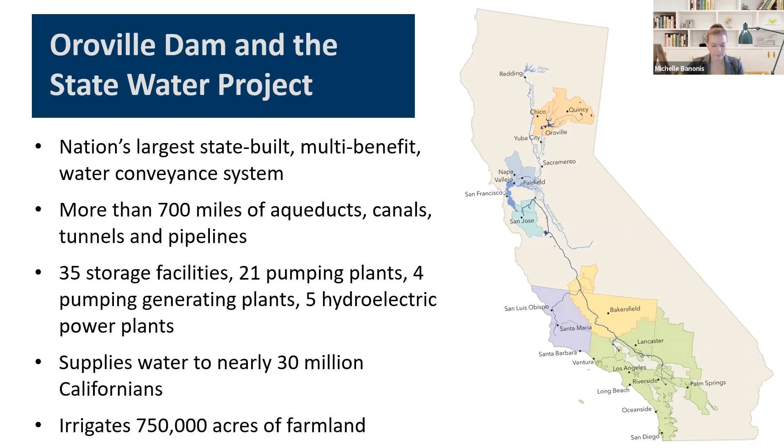So in January and February of 2017, we had some of the wettest months on record in the 110-year history of the Feather River Basin. The Feather River drainage from its tributaries provides the water supply to Oroville Dam and Reservoir, so in that watershed above Oroville we essentially received an entire year's worth of runoff.

4.4 million acre feet, for those that work in those numerics, it's a huge quantity, in 50 days over 2 months. That is unheard of. For those who study climate science, these types of events are unfortunately probably going to be more common in the future, the flashier flashes and the drier dries. So this was definitely a unique occurrence.

As water releases from the gated flood control spillway ramped up because the reservoir was filling, and we were trying to anticipate the inflow to Oroville Dam, DWR's employees noticed an unusual flow pattern in the main spillway. So the spillway outflow was stopped for inspection, and engineers found a large area of the concrete chute and foundation to be eroded, too significant at that time to repair given the pending flood conditions.

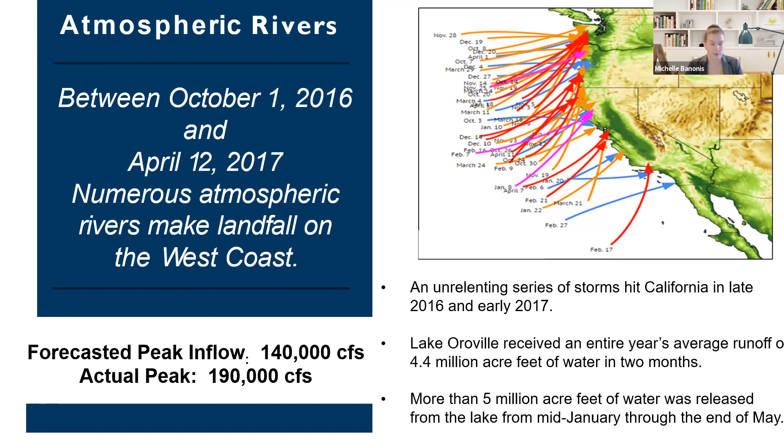DWR, my agency at that time, began consulting with the Federal Energy Regulatory Commission, FERC, which has their dam safety program, and also the California Division of Safety of Dams, which we call DSOD here in the state, to consider the steps forward.

So this is what it looked like. Of course, it started much smaller than this, but this is when we were actually able to shut off the flows and do the inspection.

As the flood control spillway releases were resumed after this and ramped up, we started to notice, because we had to make releases—it was either that or potential dam failure—people were really weighing options like, what do we do here?

They ramped up flows again down the spillway, and they started to notice significant headward, uphill erosion, and then also some downslope erosion as well. There's a diversion pool at the base of this facility.

DWR, FERC, DSOD, all the engineers and geologists were certain this would happen, but they actually didn't know how far upslope the erosion and damage would go. The primary concern at that time was if the erosion got too close to Oroville Dam and the gate control structure at the base of the dam, the spillway would have to be shut down entirely. We didn't want that either because it creates a huge issue for the integrity of the dam structure itself.

So we ramped up flows just enough to make flood space in the reservoir, and we were trying to avoid using an emergency spillway. There is an emergency spillway on this structure, which I mentioned earlier—as we're facing the chute here, it's to the left. It had never been used. Now, I won't go into why it was never used or tested, but it was constructed.

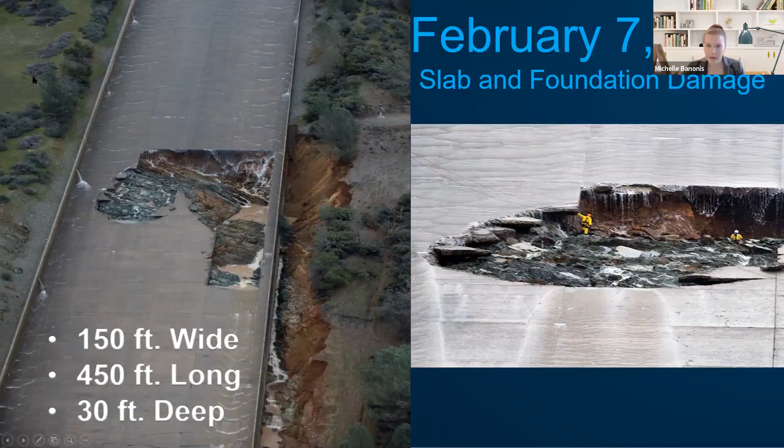So this was February 10th. Thinking a lot about balancing these risks, both of which were determined to be roughly proportionate at the time: it was either spill over the emergency spillway, which was a complete unknown for us, or severely damage the spillway structure and potentially some of the controlled outlet capabilities of the dam with higher releases.

Even though we were still releasing flows down the spillway, you can see in this picture that by this point the chute was pretty severely degraded. Some of the control walls here were worn away. There was water flowing all the way down to bedrock on this side. But even though we were making these controlled releases as much as we could, given the conditions, to try to maintain a safe level in the dam, we still ended up having to use the emergency spillway.

The day after this photo was taken, Lake Oroville's level rose above 901 feet, which is the safe storage space. At about 8 a.m., water flowed over the lip of the concrete weir of the emergency spillway, engaging it for the first time in the facility's 49-year history.

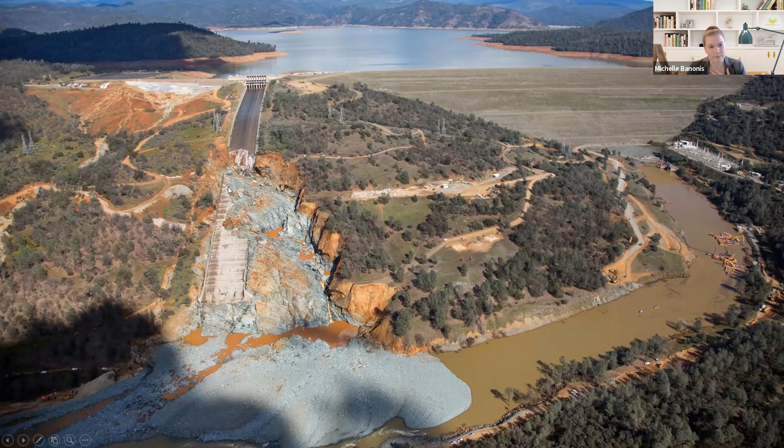This was the concrete weir I was telling you about, the emergency spillway, and this is the main spillway. You can see just a significant amount of scour in here—all of these concrete panels have been completely uplifted and essentially pulled off.

Recovery occurred in two phases. This is focused on phase one of the spillways emergency recovery project. The idea was to ensure that by November 1st of 2017, the gated flood control outlet, or the main spillway, could handle reservoir releases of at least 100,000 cubic feet per second before the next flood season.

If you look at this slide, you can see just the extent of the work that's needed, and you can really get a feel for the time constraints here. We're talking about a monumental effort to try to get to a stage of feeling comfortable and confident in the public safety of the facility.

The design happened from March to June, roughly a 4-month time frame. We mobilized in April, and construction occurred in only 5 months for this first phase. So this is pretty substantial.

We awarded the construction contract to Kiewit West—for folks who worked with Kiewit, a really reputable company—and we awarded that in April of 2017. I'll talk a little bit more about some of the contract elements, but the original contract amount was for $276 million.

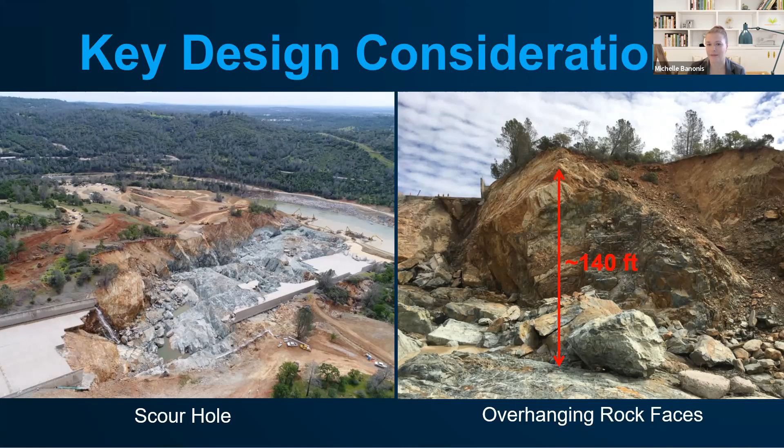Some of the key design considerations—these pictures kind of say it all. We had a few areas with scour holes, you can see that on the left. There's a diversion pool at the base of the dam here, and some of the baffles that had been eroded as well. This whole area needed to basically be filled in, layer at a time, to rebuild the spillway. On the right, you can see almost a zoom-in of the scour hole area—there are these huge overhanging rock faces, about 140 feet tall, that we had to take into consideration when rebuilding the facility.

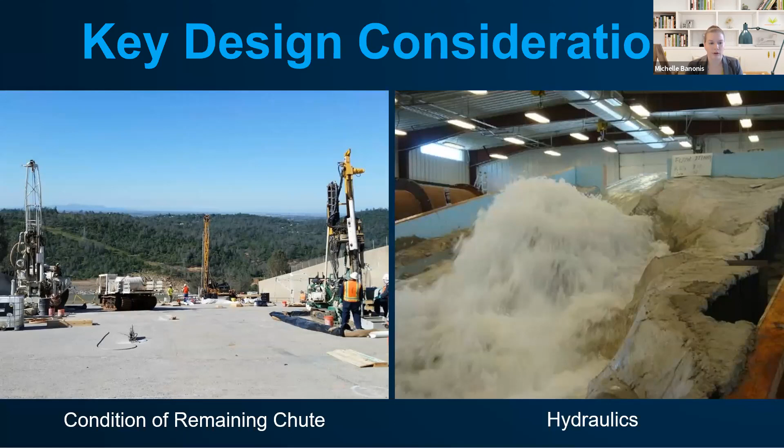Also, we had to question the condition of the remaining chute—do you save it, do you preserve it, or do you totally blow it out of there and start again, so to speak? These were some pretty major considerations, and then of course, just considering the overall hydraulics of the area.

This is sort of the construction sequence, and everything in here that's 2017 is phase 1, and everything that's 2018 is phase 2.

This cross-section down in the lower left-hand corner, I think, is a really good representation of the amount of effort that we had to undertake. This shows a cross-section of the underlying bedrock that had been worn away by the water, and we had to go in and do layer by layer of roller compacted concrete to get to the main spillway chute elevation.

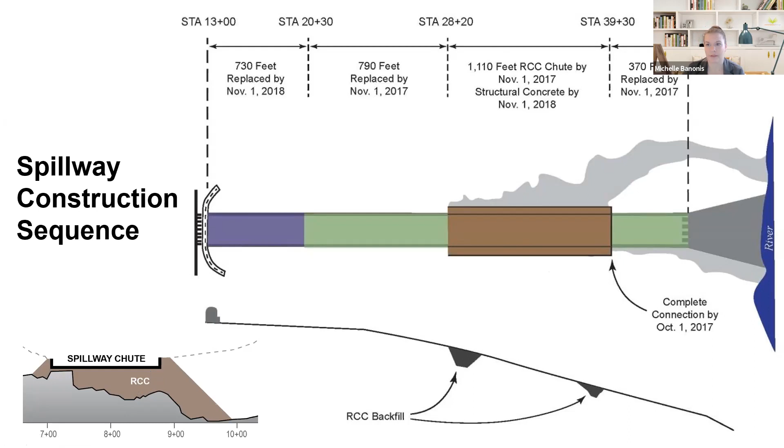This was a huge effort, and some of these efforts overlapped on each other. For example, in this middle section, we put in RCC, but then for the next phase we went in and actually put in structural concrete on top of that. So this was definitely something that had to be staged very carefully.

Just some key design milestones here. We advertised the Spillways contract at the end of March 2017, and awarded the contract on April 20th, 2017. For anybody that's worked in private industry or in state or federal government, for a contract of this magnitude, that's almost unheard of. The fact that we pulled that together so quickly was actually pretty impressive.

The scour hole slope stabilization was early May. 75% plans and specs were mid-May. Final plans and specs were the end of June, and revised plans and specs were the end of July.

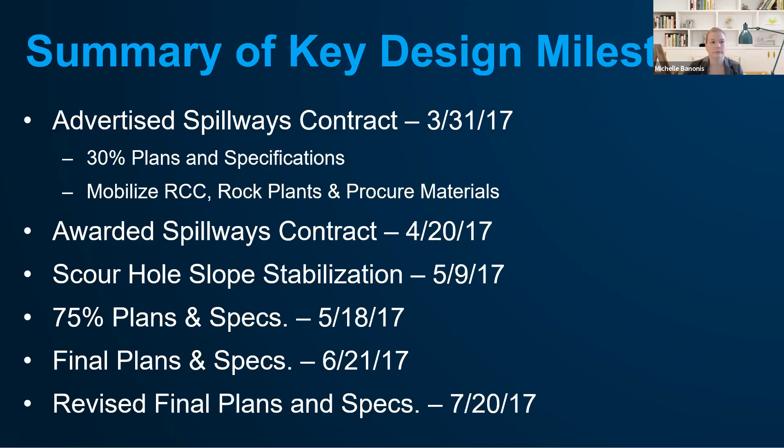I'll go through some pictures here, and give a verbal overview of the next series of photos, because I think they really speak for themselves. So I won't be talking too much about them, but I'm just going to give a preface.

During phase 1, DWR and Kiewit removed and reconstructed more than 2,200 feet of the main spillway. The section of the upper chute and lower chute were demolished and later replaced with structural concrete slabs and walls. More than 1,000 feet of the middle chute of the main spillway was reconstructed with approximately 350,000 cubic yards of roller compacted concrete.

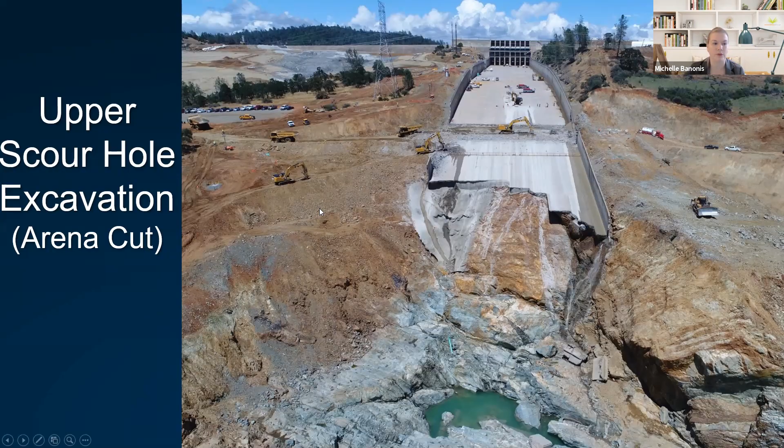This is one of the sections where the large scour holes were filled in layer by roller compacted concrete. DWR also patched and added additional anchoring to the uppermost 730 feet of the main spillway leading to the radial gates. That was in phase 2, but it's still important to note here because we're looking at different sections that got replaced over the 2-year period. This picture, I think, speaks volumes.

So this is the upper scour hole. This is the picture we were just looking at, but from a different perspective. You can actually see people down here, and you can really get a sense of the magnitude of what we were dealing with.

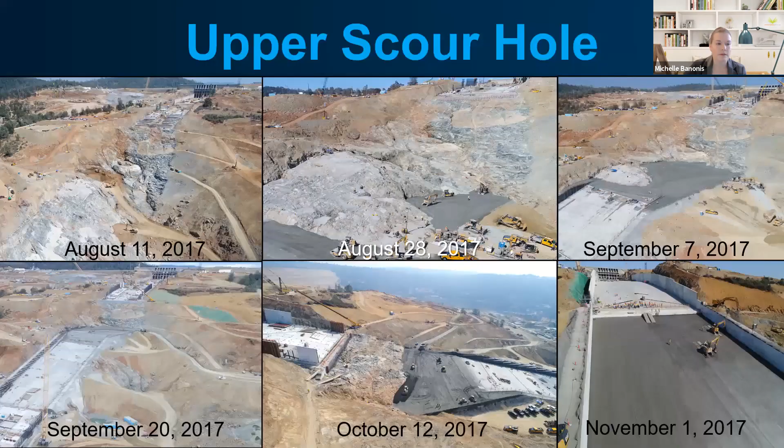This is also the upper scour hole. This shows over time, in August and September, just layering in that roller compacted concrete layer by layer, essentially getting to this nice smooth chute on November 1st. Pretty significant in a very short period of time. We did have several batch plants on site as well.

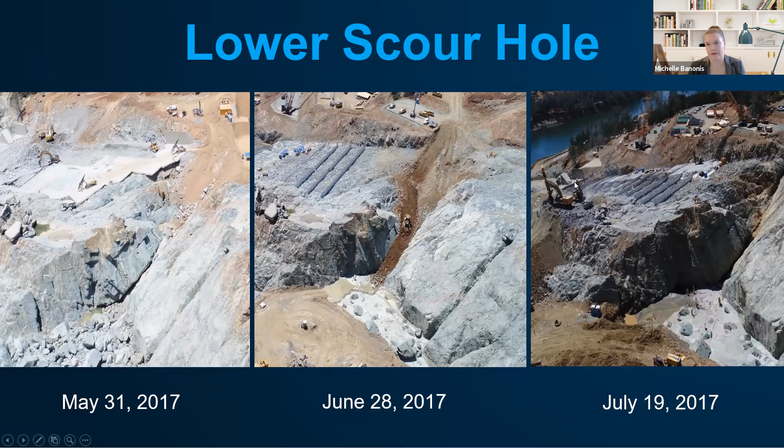So the lower scour hole - I have a few slides on this one, but we'll go through them pretty quickly. You can see this is May, again starting to stabilize, starting to fill in. This is June, and you can see things getting filled in by the roller compacted concrete. And then finally, all the way up until July, when we've got a pretty nice, smooth, even chute here.

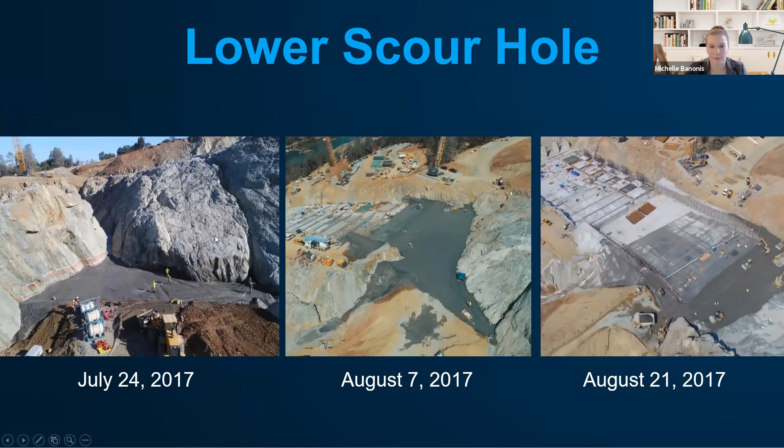You can see the guys working around these huge scour holes, layering it in bit by bit - pretty impressive. And then the upper chute construction.

This was kind of cool because I was actually out here for some of this - they had put some explosives in here to actually blow out a lot of this concrete, which was pretty interesting. They did that, and then brought in some jackhammers and knocked out a bunch of this concrete from the original construction of the chute, cleaned it all up, and went ahead and added in the rest of the concrete layer by layer.

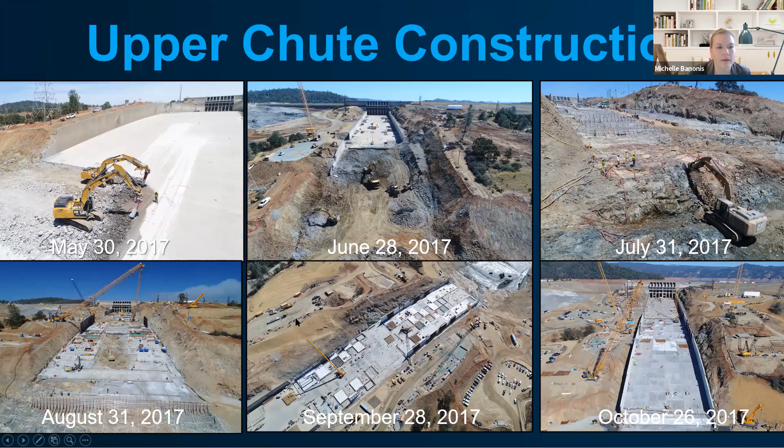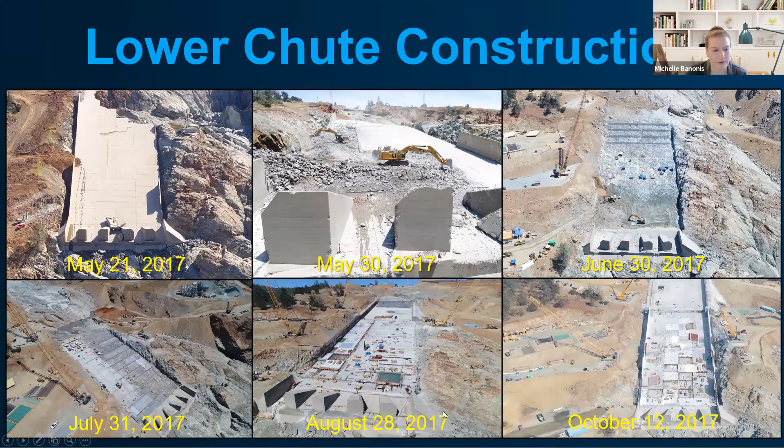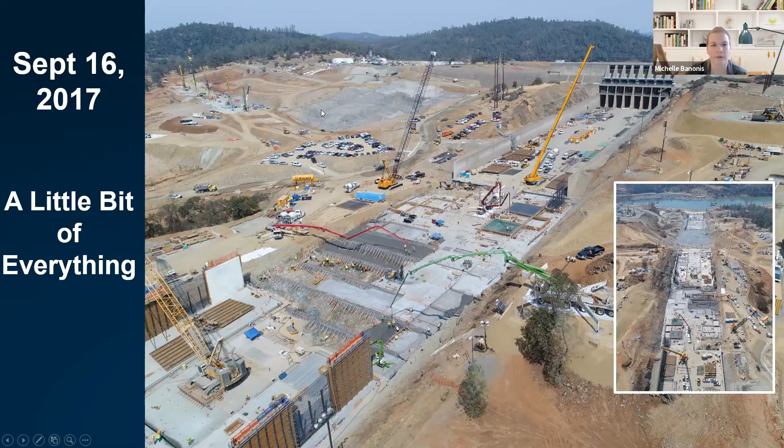This is just an overview of the overall spillway between May and November 1st. You can really get an appreciation for the amount of demo work and reconstruction work that got us to meet the next flood season.

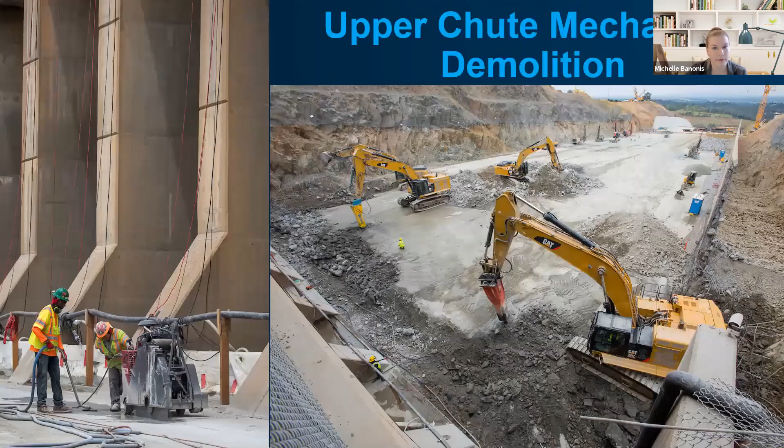So phase two—we're not going to go into the emergency spillway portion today, but there was also roller compacted concrete splash pad put in, intended to armor the terrain and reduce uphill erosion. Phase two of the project began in May 2018 on the main spillway.

These are the walls right by the radial gates on the dam. The uppermost 730 feet was removed and reconstructed with steel reinforced structural concrete slabs and walls. The chute was brought to final design by adding a 2.5-foot layer of structural concrete, as well as replacing the roller compacted concrete walls with structural concrete walls.

Understanding that in 2017 we had to do some things we knew we'd have to remove, because we were trying to be as safe and as quick as possible.

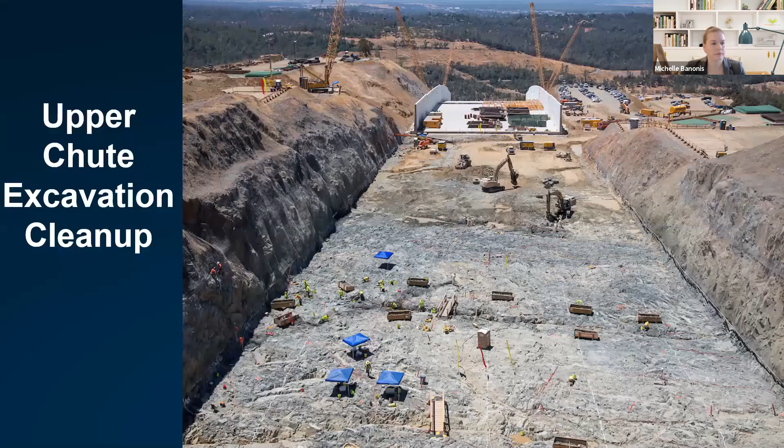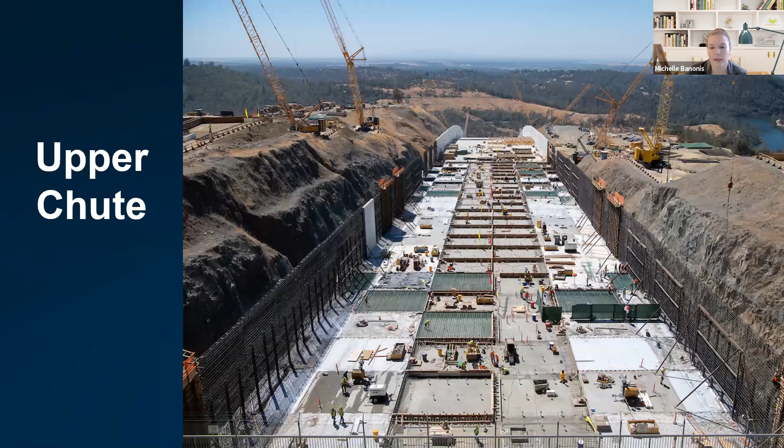This is just another overview. The radial gates are at the top of the screen, overlooking the chute going down. This is just after everybody pulled all the existing concrete slabs out, and here you can get a view of everybody pouring concrete all at once, putting in the reinforced steel. I think this picture speaks volumes.

As we were nearing November 1st, these are the final moments, people working around the clock to beat the deadline.

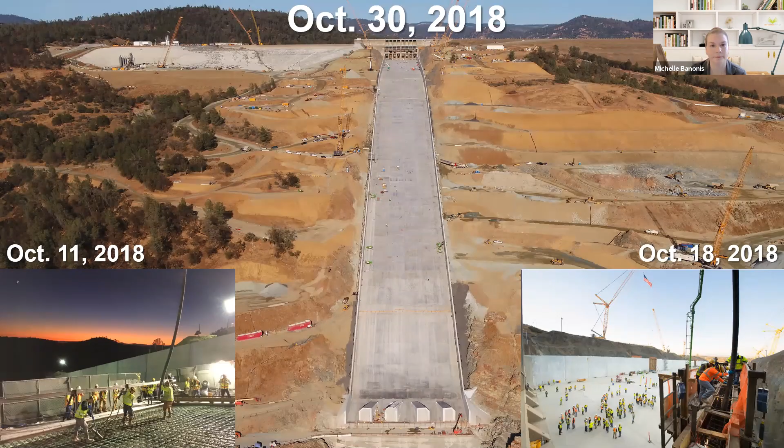On April 2nd, 2019, we ended up using the spillway for the first time, and the good news is it worked beautifully, exactly as anticipated. There was a lot of scrutiny around it because people were concerned, but it came out perfectly. There were a lot of eyes on it, a lot of analysis, and it worked very, very well.

For those wondering what the overall price tag was, we're looking at roughly $1.1 billion for this effort, for both phase 1 and phase 2.

You may also ask, where does that money come from? Initially, we are a user-funded entity. In a normal set of circumstances where this is not an emergency, it probably would have come out in the rates of wheeling water to municipalities, which attenuates because we serve millions of people.

But we did petition FEMA a few times to get reimbursement, and FEMA did agree in February of this past year to reimburse the $1.1 billion. They did consider it to be an emergency, and there was a lot of back and forth there—I wasn't involved in all of that. I just know FEMA rejected it and then approved it, so it went back and forth.

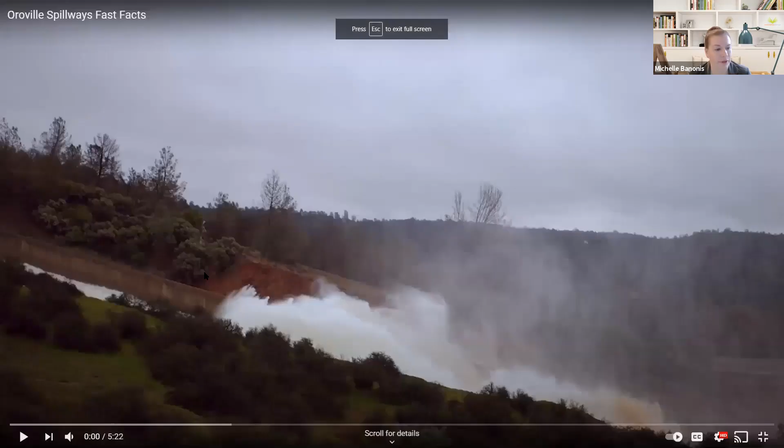I'm going to play a video now, and I'll go ahead and share my screen on a different screen here. We're going to watch a quick video - it's a 5-minute video, but it's really cool. It's a time lapse and gives you some engineering statistics related to the Oroville recovery efforts. So go ahead and watch that.

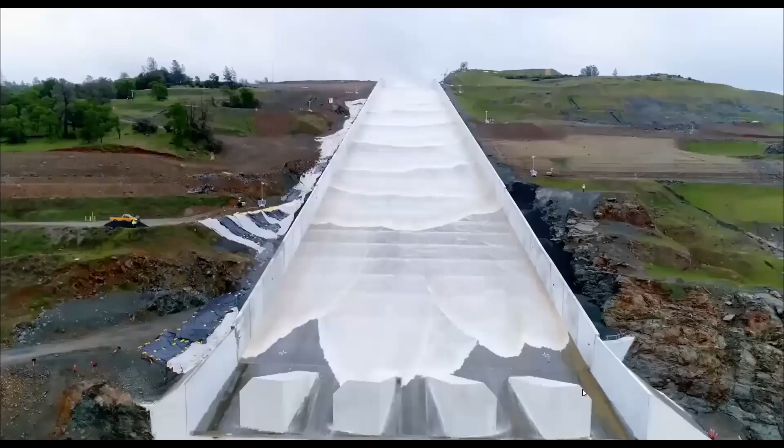All right, so for those of you asking if there was sound, there was just music, so you didn't miss much. It's all good. Oops, it's still playing in the background. All right, we'll stop that. Sorry about that.

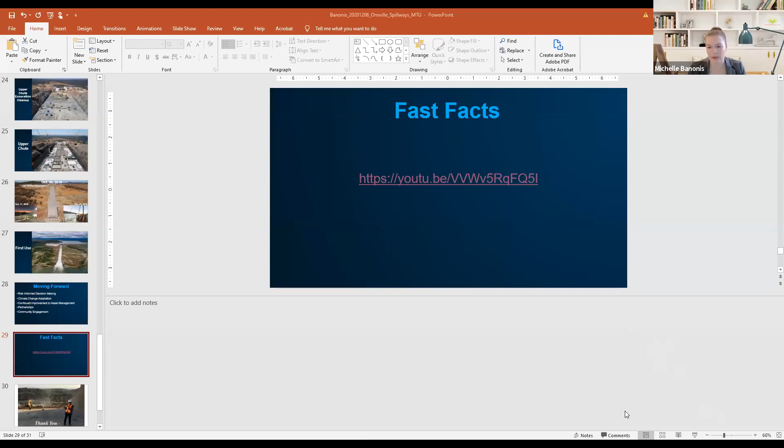All right, so I'll go back to my screen really quickly here. For those of you who are interested, that video is available on DWR's YouTube channel.

I just want to say thanks - I'm done, this was me. I was pretty excited to be out there a couple times, and I actually got to do a really great helicopter flyover with the Butte County Sheriff all the way from the Upper Feather. This was probably about in the May timeframe, a little bit after the Spillways incident. I actually was not with DWR at that time, just for folks who are curious. I did not come on to DWR until about a month and a half, 2 months after the main spillway emergency occurred. So I was not there during the decision-making processes originally, but I did get to see a lot of the recovery effort, and that was really, really cool.